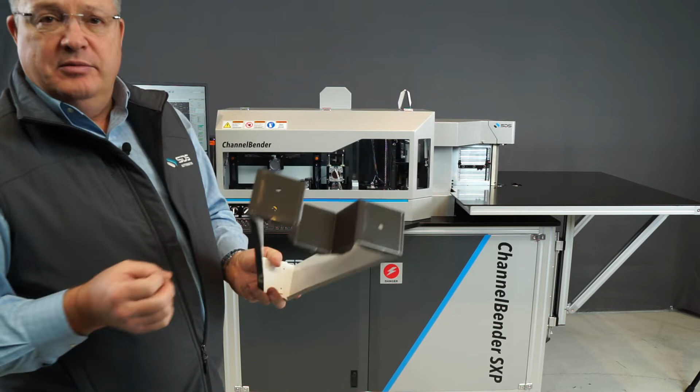So that hole punch can travel up and down, put holes anywhere in the wall of the letter, or even the flange. It can put 1/8-inch rivet holes in the flange if you need to rivet your back panels on.

And then the machine will automatically move on to bending the inside part of that letter A. It will create the same 1/8-inch rivet holes and offset break at that overlap.

So it will do one part and then automatically move on to the other without any additional input from the operator. So whether you need to run one letter because something got damaged, the machine can do that. If you need to run an entire set of channel letters, your operator can set the toolpath for the entire job, and the machine will run one letter after the other until it's complete.

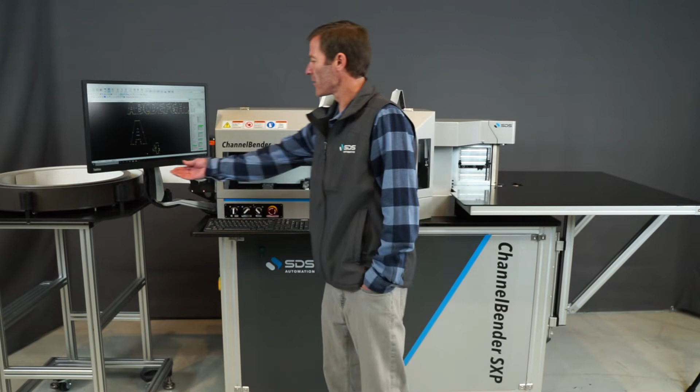All right, let's take a look here into our software that we have on all of our channel benders, our SDS Bender CAD software. Our software is able to open design files of different formats, whether it be Adobe Illustrator, a PDF, or in this case here, and most commonly, a DXF file.

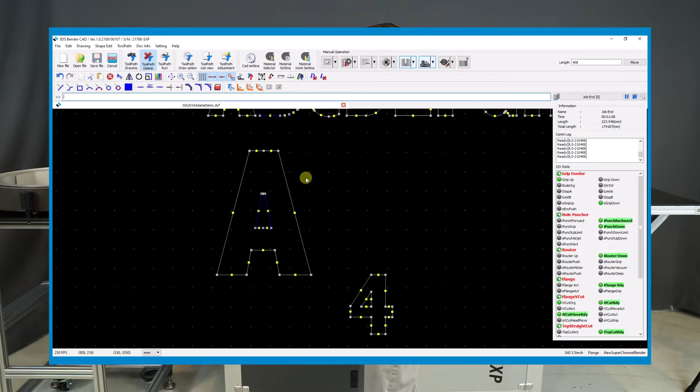So as we can see, we've got our full file here. We're going to focus in on this A. And I do have the machine loaded right now with 3.5-inch 040.

And we do have our material catalog or material selector here in our software. We can verify that we have that material selected. That will apply all the proper processing settings, as well as the machine function for this type of material with the flange. So let's go ahead and select that.

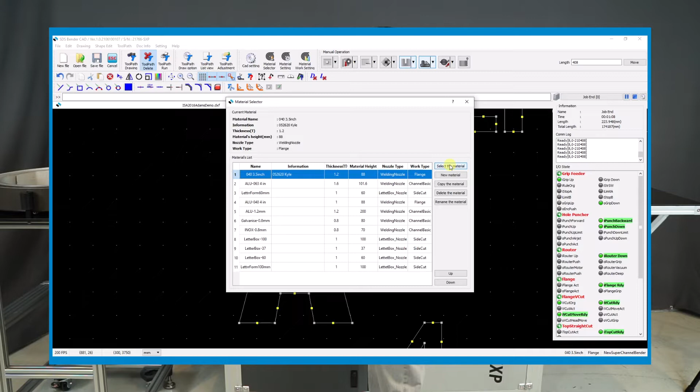So first thing we need to do here is choose where we want the seam on our letter. And in most cases, on the outside of the letter, the seam is towards the top, so it's not visible when mounted. So I've got a point here that I'm going to use for my seam. And we're going to select toolpath draw here, and because I want my seam up here, I'm going to select that as my start point for my toolpath and my end point.

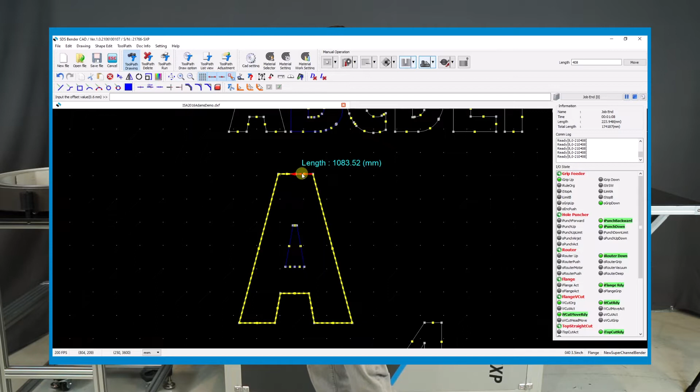Now you'll notice that I drew this toolpath in a counterclockwise direction. This will accomplish one thing for us, and that is how the offset is applied to this toolpath. This file here is the same file used at the router to cut the back panel out. Therefore, I need my return to be a little bit bigger than the back piece so we can fit that in there. So by drawing my toolpath counterclockwise, I'm applying a positive offset to the return so it fits around the back panel.

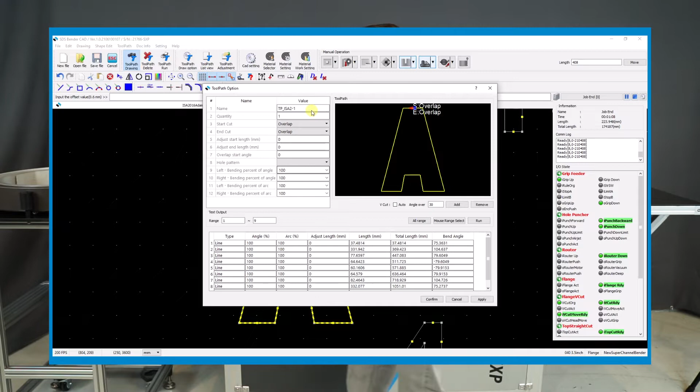So let's go ahead and set that. This brings us to our toolpath draw options, where we can adjust the quantity, the type of seam we want, whether it's our overlap seam or maybe a butt joint, more commonly used for 063. But we have all those options here. I like what we've got, so I'm going to go ahead and apply this and move on to the next piece.

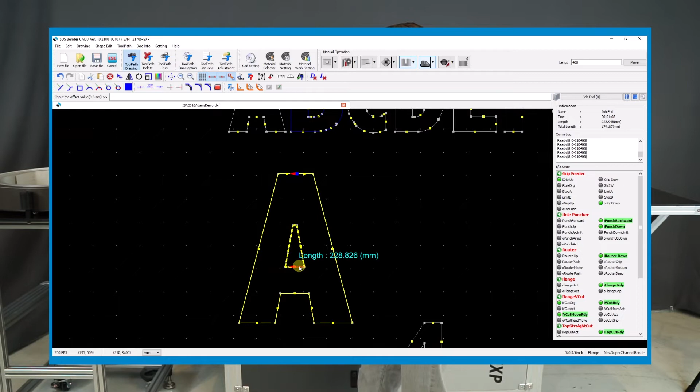Now let's go ahead and draw the toolpath for the inside. So again, toolpath draw, my seam here at the bottom, and in this case where my return needs to fit inside of this hole here, we're going to draw that toolpath in a clockwise direction, so again the offset is applied properly. Got my options set here.

Now I do want to add a couple drain holes to the outside of this letter A. So we have our hole selector here. First we're going to choose this one that's going to apply 2 holes at this location. And then let's apply just 1 on this other leg, just so we can see the versatility here in setting these up and using the punching unit.

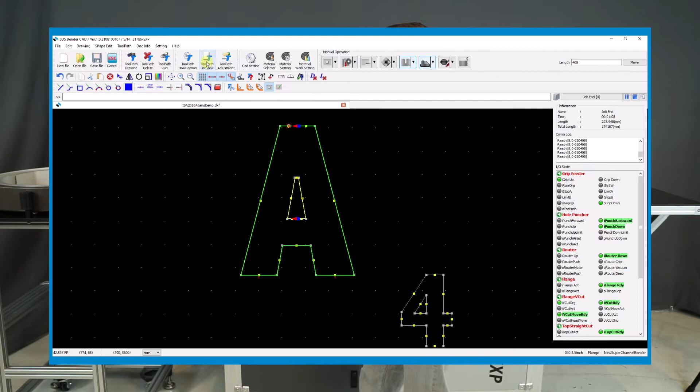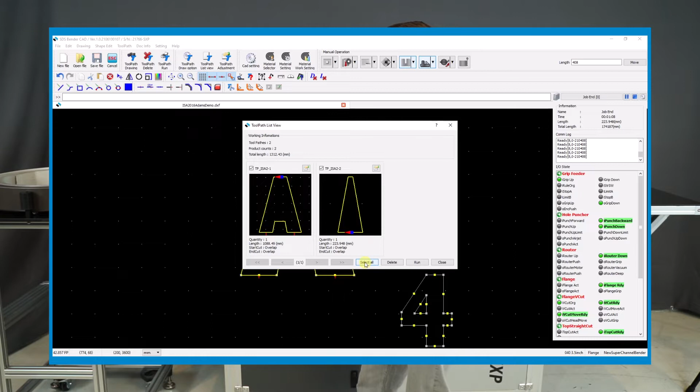All right, so we've got our toolpath on our outside with drain holes. We've got the toolpath for the inside of the letter A. Utilizing our toolpath list view here, we can see a graphic list of all the toolpaths drawn within this file. In our case here, there's only 2. But we can individually select the pieces we want, or if I had a fair number of toolpaths, I could also use the Select All button here to select the whole set.

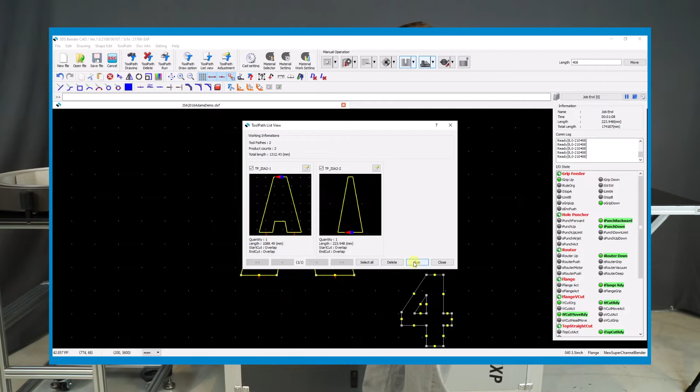I've got these 2 selected. I can see how much material is needed for those 2, so I can take a quick glance at my coil and make sure I've got enough there. Well, let's go ahead and run this. So as soon as I click the run button here, the machine's going to start processing these 2 pieces. So let's get going on that here.

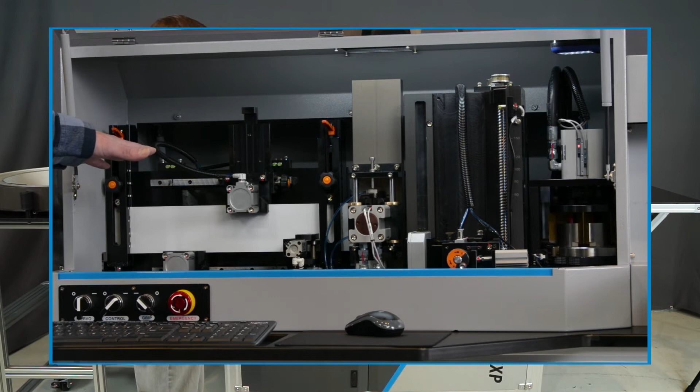We'll see each piece starts with a nice clean cut, and then we're removing that overlap seam there. Let me go ahead and open up the cabinet here so we can see a little bit more of what's going on. We've got our feeding unit here, moving the material. And now our punching unit, which is auto height adjusted, applying those punches at the heights indicated, whether it's for the rivet hole or the drain hole. Our flanging unit back here, creating the flange, and then our notching unit, notching the flange where needed.

And now we're starting with the bending here, first bending that offset overlap. See those drain holes created there in the flange, or in the return, excuse me.

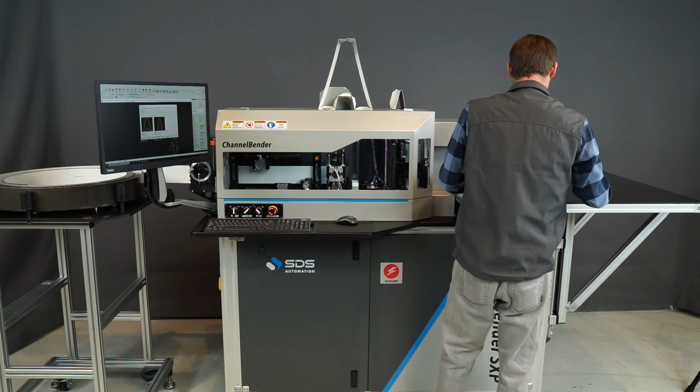All right, so there we have our outside piece, and it's going to move on to making the inside piece here.

Again, bending that overlap seam.

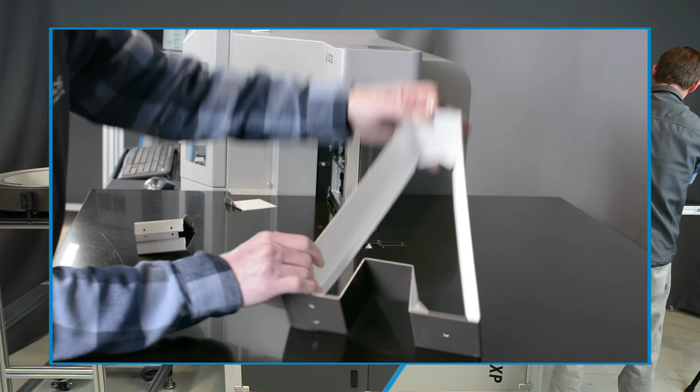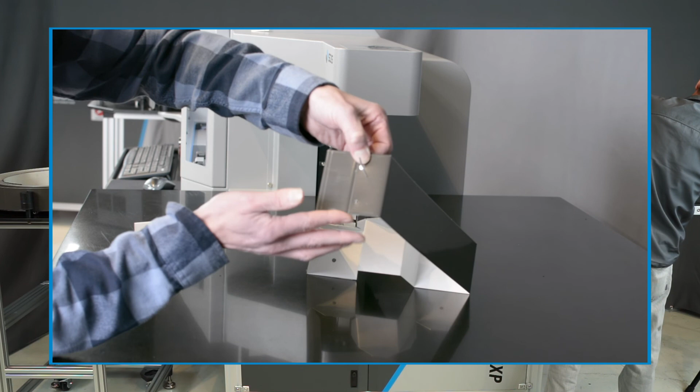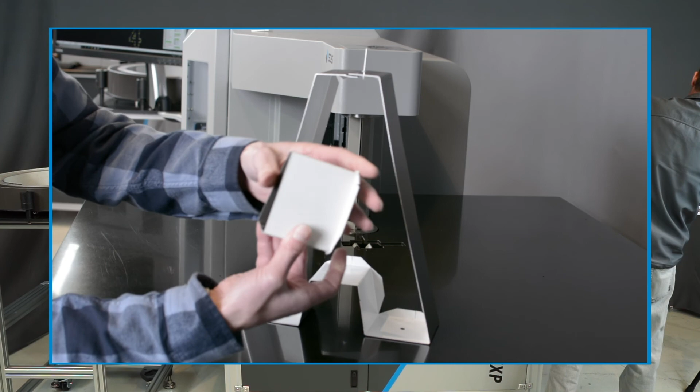All right, so let's take a closer look at these two pieces here. We'll move into this side camera. So here we have our outside piece, again with the rivet holes, and then our overlap seam here with our drain holes on the bottom, rivet holes up top here. I've got a rivet here, and we can see how well those line up. I can easily slide a rivet in there and pull it tight, but you'll see how that lines up beautifully. It's flush here on the front because we removed that flange there. And then we've got the same here for the insert. Comes together nicely, fits right in there.

So there you have it, a brief overview of our ChannelBender SXP running a 3.5-inch flanged 040 return.